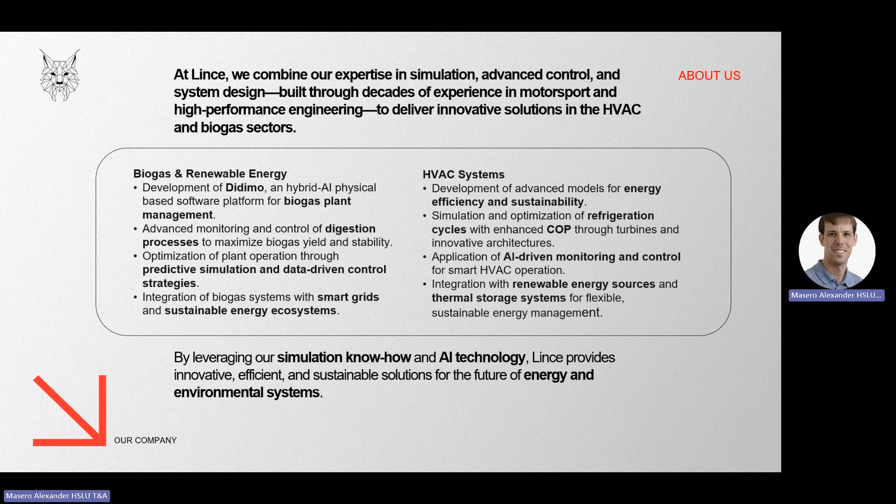Another big project that we are working on is the design, also with 3D printing technologies, of a turbine that can recover power during expansion of fluid in refrigeration cycles.

Obviously, we are still working for motorsport. One of the main typical things that we have in Lince is the possibility to cross-correlate the knowledge of different people. We are multidisciplinary, and we are still working on composite materials, especially carbon fibers. At the moment, we are capable even of designing a full racing car from scratch. The only thing that we are not dealing with is the powertrain at the moment.

So why biogas? One of the main challenges of biogas processes is that biogas production is non-linear and time delayed. In a typical cycle, if you change the input of a digester, it takes more than 10 days to see the results. So it is quite a slow process. The other big challenge is that energy prices are quite volatile, and they change very fast, and also by sensible quantities.

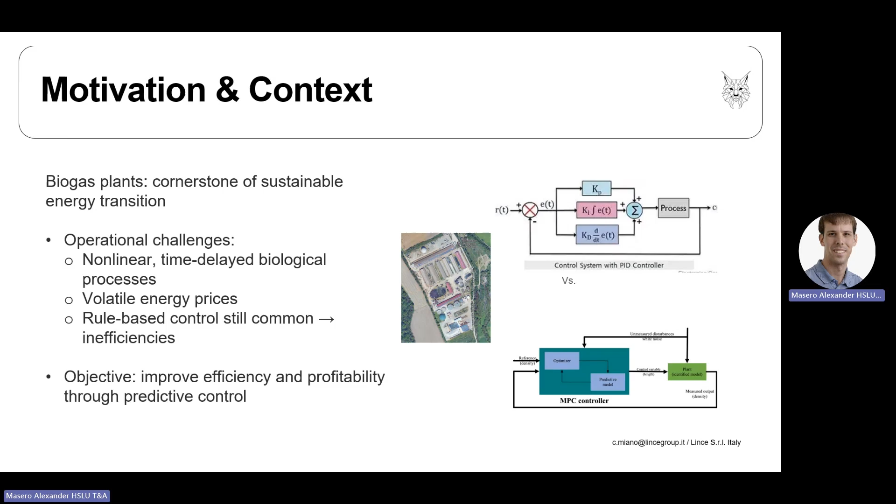And it's managed by two or three guys that are not doing only this job, but are also doing something else in the meantime. So the idea is to help these guys by improving efficiency and profitability of the plant with modern predictive control. Consider also that the investment is not negligible in this kind of plant.

The framework used was basically based on Modelica and Modelon Impact, with the possibility also to run simulations using Optimica and IPOPT. What we were doing, and we are still working on, is the orchestration of this optimization in a Python environment, in order also to retrieve information from the web regarding weather forecasts and, very important, energy prices. At the end, the outcome of this model predictive control is a techno-economic optimization.

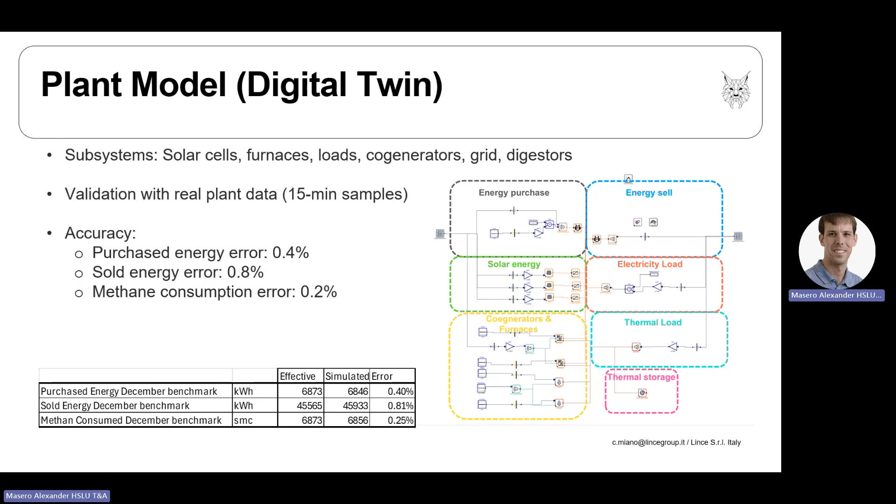So the control variables typically are obviously the energy purchase and sell, and also the partialization of the cogenerator, because having the solar energy, you need to follow the energy production with the cogenerator, considering the actual solar energy arrived in the battery. So the main objective is minimizing the energy cost. At the moment, we are still experimenting with the methodologies. We have a receding horizon that is updating the optimization every quarter hour or every hour, in order to track as much as possible in terms of cost optimization.

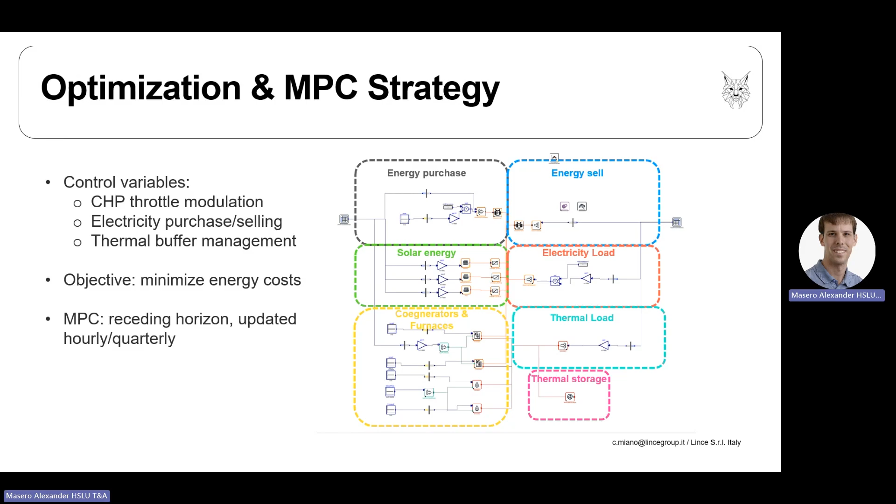So the other big activity that we are doing now is the possibility to track energy price. I was speaking about the possibility of orchestrating the optimization in Python, and then from the website, using specific APIs, you can retrieve all the data regarding energy prices, but also, very important, the forecasts like temperature profile and irradiation profile, that are very important to be able to track the result of the report.

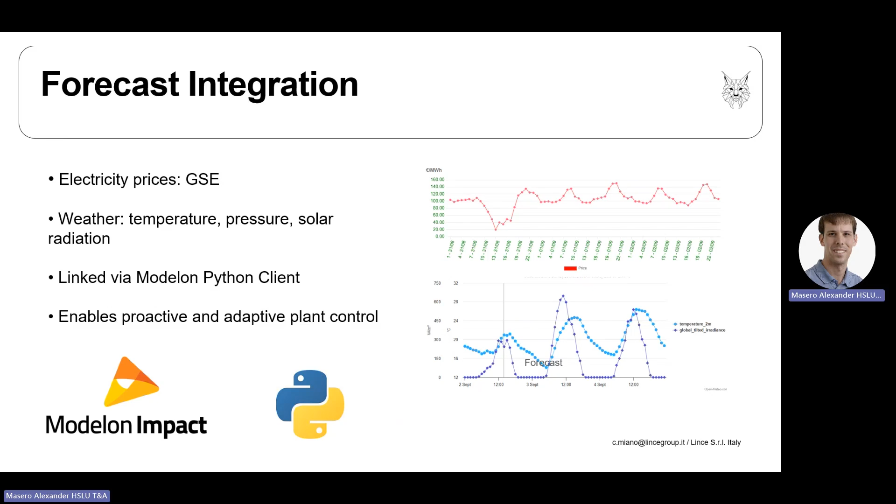So just to show a typical situation. The first example is without constraining the digester on having the same energy, okay? And looking at this scenario, by changing the selling price of the energy, you can find, via optimized control, different patterns, different profiles that are optimizing the operational cost of the plant. For example, in this typical use case, we consider one month.

We have found that if the price of the sold electric energy goes below 85 euro per megawatt hour, you need to be in a very autarkic regime and follow as much as possible what the sun is giving to you. The other threshold is, if the price of the energy goes above 90 euro per megawatt hour, you need to go full throttle. In between, you need to do partialization, and this is what the optimal control continuously is trying to do.

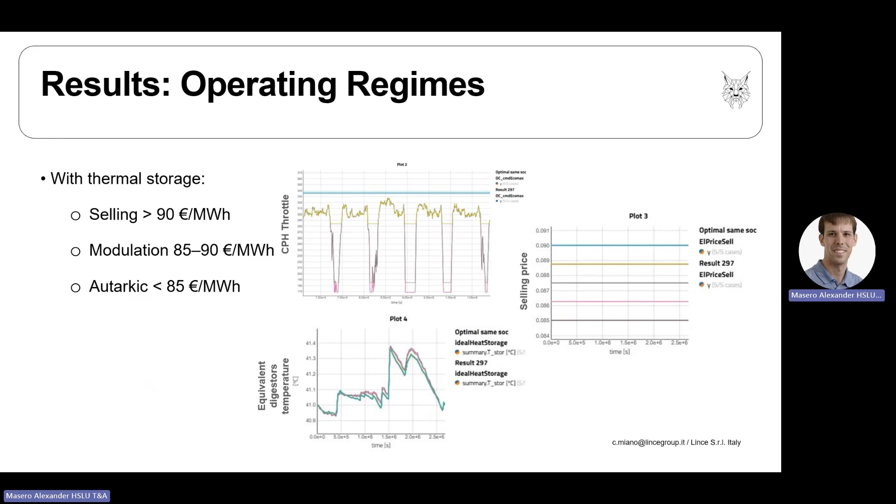So this was a kind of first step that we did for this customer in order to convince him to further invest in this project, and obviously they are very happy. So you have to consider that in reality the plant is not always running 100%, especially at the beginning. So there were some times of maintenance or hours that need to be considered also in the final consideration and the final cost

comparison. And what is very, very interesting is that, depending obviously on the incoming energy on the plant, we were able to save always something around 7% on average, but in some months it could have been even higher. So at the end, the key outcomes, I would say, are obviously reduced cost, especially in low price scenarios, and also strong validation versus real data. Obviously, we could also underline to the customer the strategic value of thermal storage.

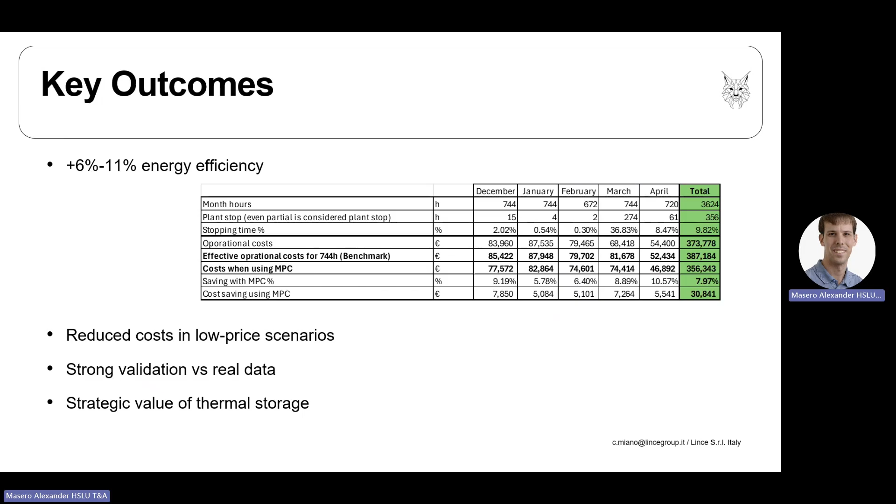So at the moment we are still working on this project, and obviously this was a kind of concept work to demonstrate to the customer that the idea is worth it. At the moment, we are working a lot also on the infrastructure of the plant, so we are improving a lot the internal communication between various parts of the plant. We are also obviously creating a big database that can retrieve all the data and properly manage all the information coming from all the components of the plant.

So another thing that we are working on a lot is the digester modeling. You have to consider that at the moment we already have some models, but these models are very complex and sometimes more suitable for scientific research. We are speaking of something like 90 equations, to consider also the bacteria population. But at the moment, we are trying to simplify this model because some dynamics are very fast and are not really useful, at least for engineering purposes and for the final target that we have.

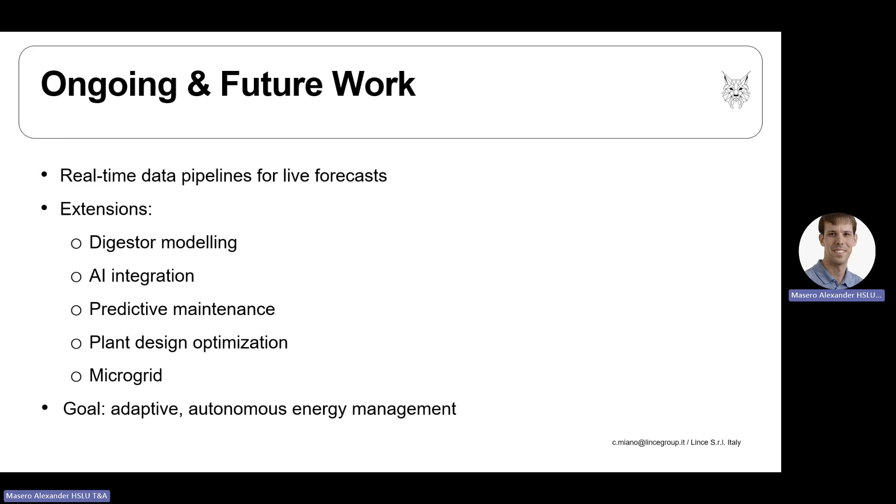So another important thing is obviously to use the tool for predictive maintenance, especially at the beginning of running the plant. It is something that the customer requested, and it's very important for him. And obviously, in this case, we didn't have the chance to participate in the design of the plant. But another important fact is that this was a prototype plant, the first in a series of plants, and probably the next one can be improved by using simulation models and simulation.

So at the end, in conclusion, the biogas plant could be a viable solution for sustainable energy. And also you see the digital twin together with the MPC improves the efficiency. And also the very positive thing is that we were able to create a framework that will, not probably, for sure, be used for other renewable systems and be scalable to other plants. One thing that is very, very important.

So we started this project quite recently, so it didn't take too much time to get to this level and to be able to do a demonstration. We started from scratch, and in a very short time, by using Modelica and the available Modelica tools, we were really able to create a concept design of the model predictive control that the customer really appreciated. This is also, in my opinion, something to be considered very, very useful in this case.